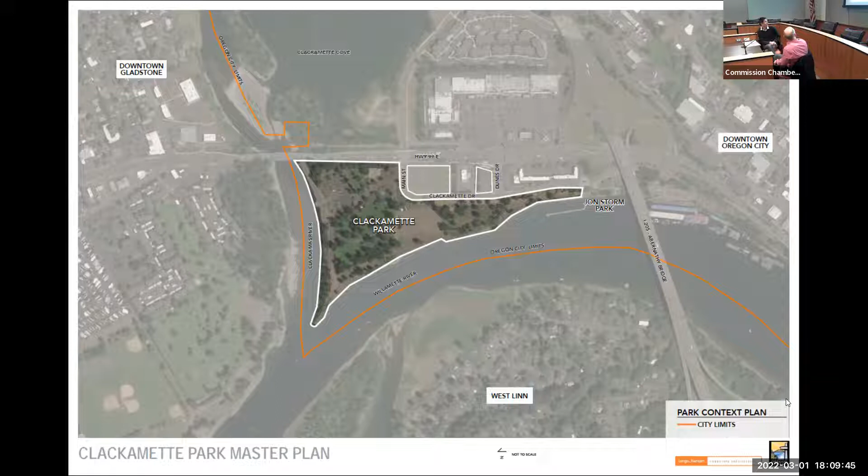Before we dive into some of the plans that speak to the specific characteristics and elements of the site itself, I want to briefly cover the history of the park, how it has served the community throughout the years, and what the character of the park is.

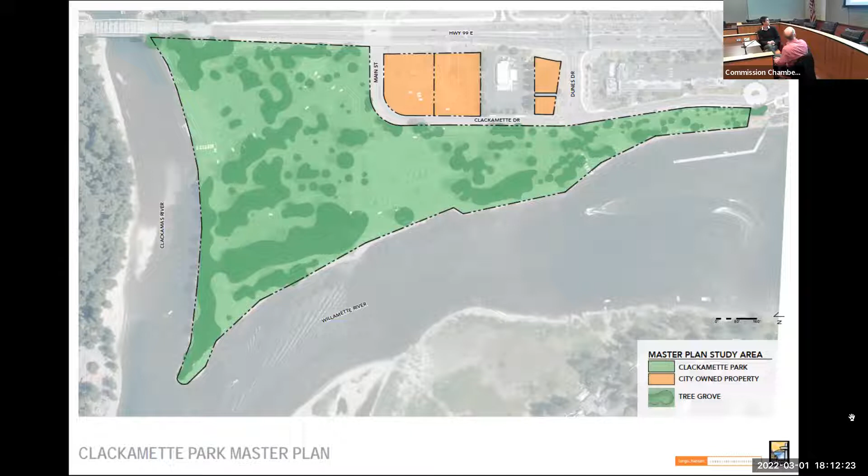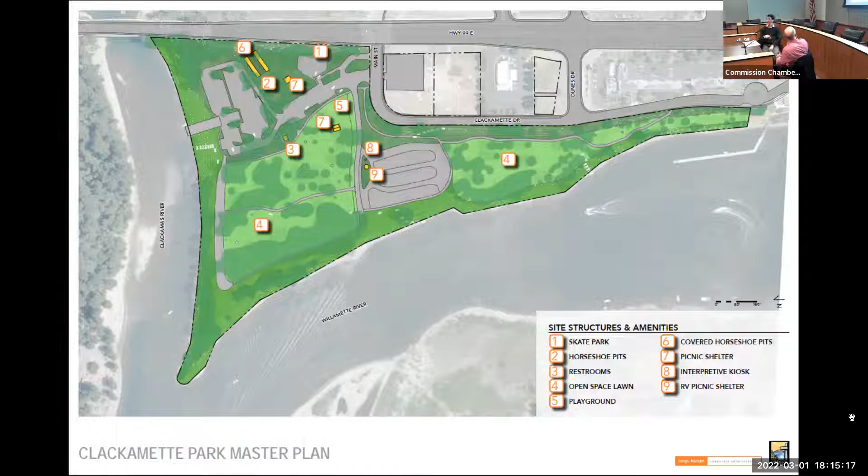Highlighting here is starting to look at the site structures and amenities, the buildings on site. As all of you are familiar with this site, I just wanted to review it. There's the skate park, rentable and reservable shelters, both covered and uncovered horseshoe pits, and a restroom. As in the photo earlier, there's one feature that's not built but is noted by number 4 - that's just the open lawn area. Numbers 8 and 9 are a small kiosk near the RV park, and a larger covered area built by some of the students.

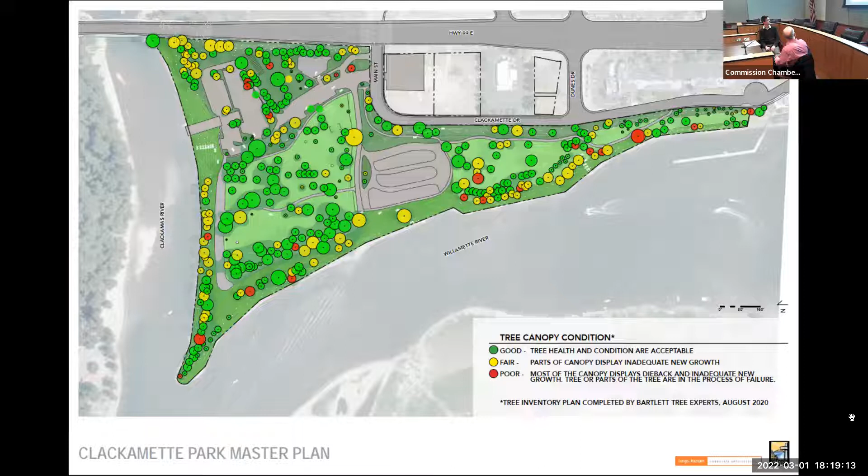We've actually spent a lot of time down in Clackamette Park, but for those of you that have lived in and visited it often, both here in the audience and virtually, we'd be interested if anything we presented - any comments, anything you think we missed or should add to these slides - just so we have a good basis for the design.

That's a good question.

Yes, yeah, August 2020. Anyone that was there, yeah.

At that point, I forgot to touch on just a quick overview of the tree species there. It was about 40%, 45% of the trees with bark are black cottonwood. Next in line is the Doug fir, maybe about 10%, then maple, and then a number of smaller species.

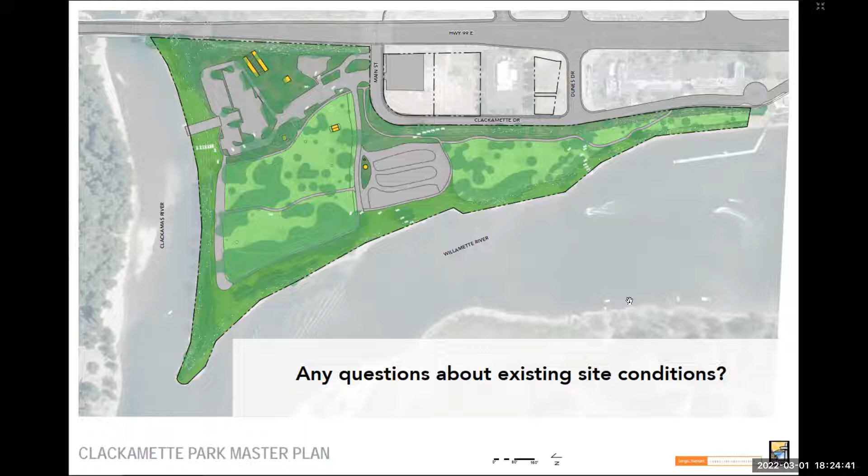I don't know if I missed that, but for people who have issues with walking, like what does the access to the park look like, and what features are available currently, or what is missing currently? We'll do that for the next round.

So one thing we have to remember now is that there's going to be possibly 1,000 people living at the cove there. There's probably 500 there now, but when it's all built out, there's going to be like 1,000 people. This is going to be their park too, so let's all keep that in mind. This isn't just the city, but I hope that you're contacting those folks, is it the Edgewater, I think it is called, because you'd see what they would like to see there too, because this is kind of their neighborhood park that we're all doing around here now. So, okay.

Jeremy, go ahead. Jeremy, are you there? Might be on mute. We can move forward, we can't hear you, Jeremy. No, we can't. Move on, and maybe you could also. Well, we can move on, and then we can hook. Sure, yeah, go ahead. Yes, we can hear you, Jeremy.

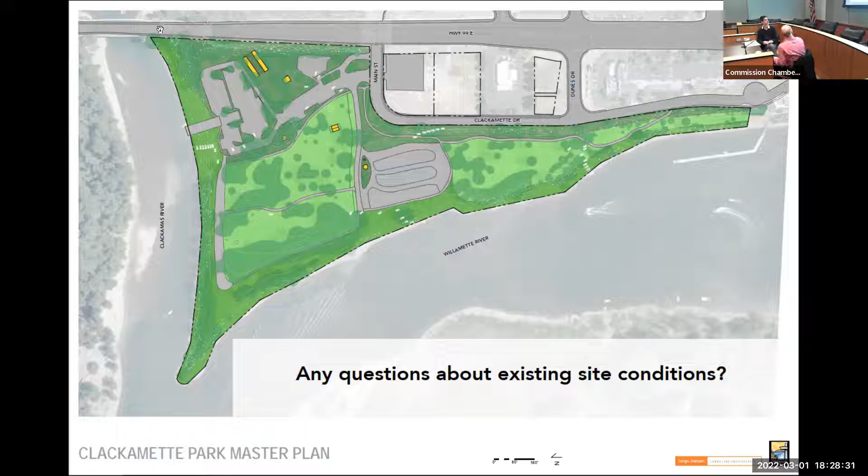Let's go to the next slide. So this is really more of kind of listening for us, and for those of you that took the public survey, some of these questions you may recognize, but we felt it was important to kind of get the word out and hear what neighbors and citizens had to say. We're going to start out, first of all, with just kind of overall park character.

We'd like to hear from you on your thoughts, and there will be some subsequent slides kind of associated with that. The second one, we'll really focus in on the site amenities. We really want to hear what your priorities are for what you would like to see in the park, both what's existing that you would like enhanced, or perhaps new amenities that you'd like to see. And then the third one, we felt it was really important, just the river access, to have a conversation on that particular part, kind of set aside from what's happening inside with the other amenities.

So let's go to park character first. The question, and it may seem a little open-ended, but how would you like the park to feel? If you go to the next slide, like to almost think about if you had a friend or someone that hadn't been to Clackamette Park before, you'd say, oh, we have to go down to Clackamette Park because it's just - and how would you want to describe Clackamette Park?

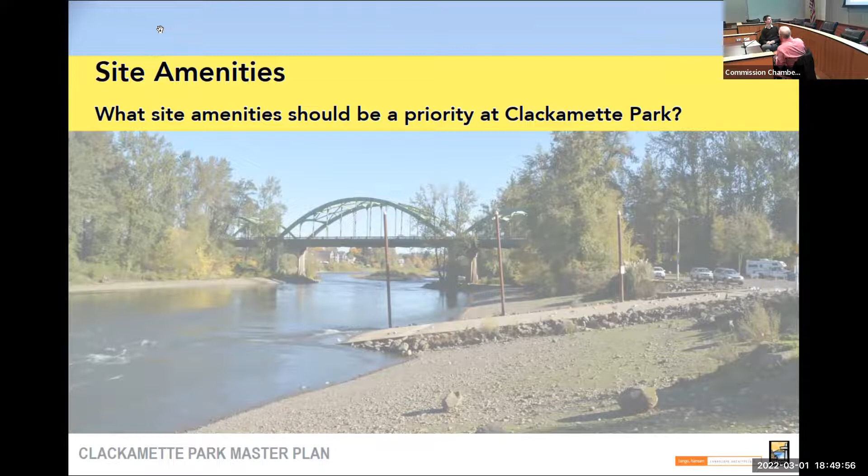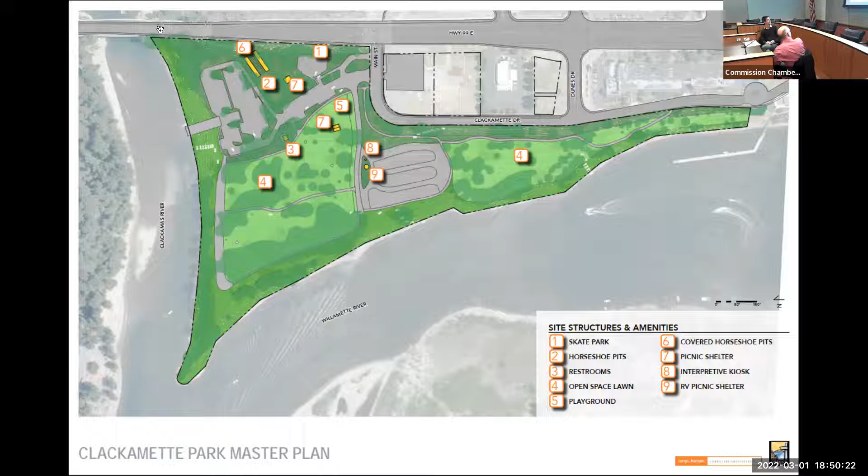Just as a refresher, you already saw this. I won't spend a lot of time, but the park has the skate park, the horseshoe pits, general open space, a playground with a single swing set, picnic shelters, interpretive kiosks, and the RV park as well.

I have a heartfelt place for things like interpretive signage, and I know there are issues with maintaining it and all those kinds of things. But we've talked about the unique nature of where the park sits, and the opportunity for interpretive signage at a lot of different levels is high there, if we can figure out how to do it without costing the city a fortune to maintain. I think that's the real challenge. We miss some opportunities there now, I think, that we haven't really reached out and tried to enhance to the level they probably should be. I'll hold off on some of the other things when we get to other discussions.

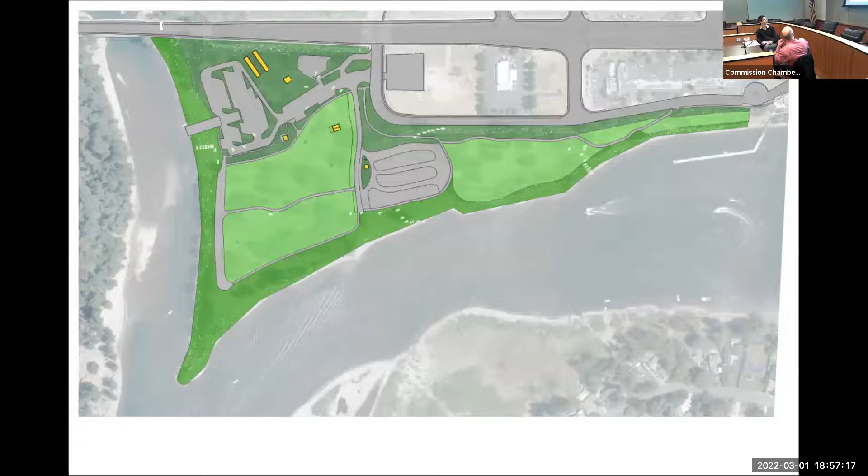Just a refresher—to the best of our ability we tried to show these different river access elements, maybe not exactly in this place for some of them, but we're showing the existing boat launch, number one.

Then there was a study done several years ago about relocating the boat launch about 350 feet downstream, so that is where number two is. There were engineering plans done for that, and that's something we'll consider as we begin to look at options and different concepts.

Number three, a human-powered craft launch. We've been talking a lot about the wave, certainly swimming, general shoreline access, and fishing as well. Some of these are more zones, so they're not just in that exact place. But the question—if we go to the next slide, Brian.

Just one more. We thought it was helpful to point out some of the other boat ramps in the area. We've been talking a lot about what's happening in our park, but on the Willamette there's the Sportcraft Landing, the Meldrum Bar Park, and further down the Cedaroak boat ramp too. So just thinking about river access, particularly the boat launches, and what's happening nearby.

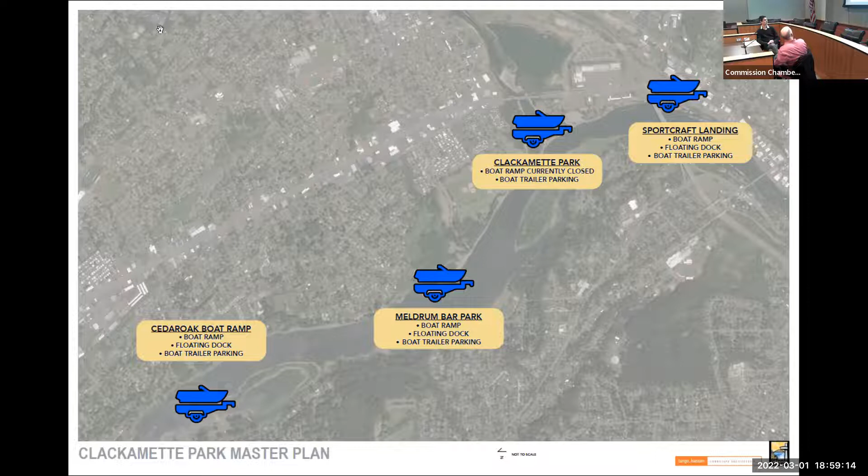So the last slide—this question is, what sort of river access best serves the community? Again, are there things not on this list, or things we should really be thinking about in terms of river access? What's important? What should we keep as we begin to look at these different master plan options?

Thank you. I'll just start out directly and say we've had a lot of discussion about the wave, and that's a really unique and interesting factor that has shown up there, and something we probably ought to try to utilize and work with. At the same time, we do need boat access—we do need a boat launch at this location. We've talked about Sportcraft, and I agree with this gentleman here.

I don't know how many in this room are good enough to launch a boat there at Sportcraft. You can probably launch the boat, but I don't know if you can get your truck back out of there after you've done it because it's so small. And there isn't really any way you're going to expand it—at least I'm not sure where, and I've been around that boat ramp for a long time. So that access is about 20 boats, as he said. That's about all you're going to have.

Meldrum Bar is another location. Obviously it's got a lot of room. And Cedaroak has some room too, though it's not a particularly large ramp.

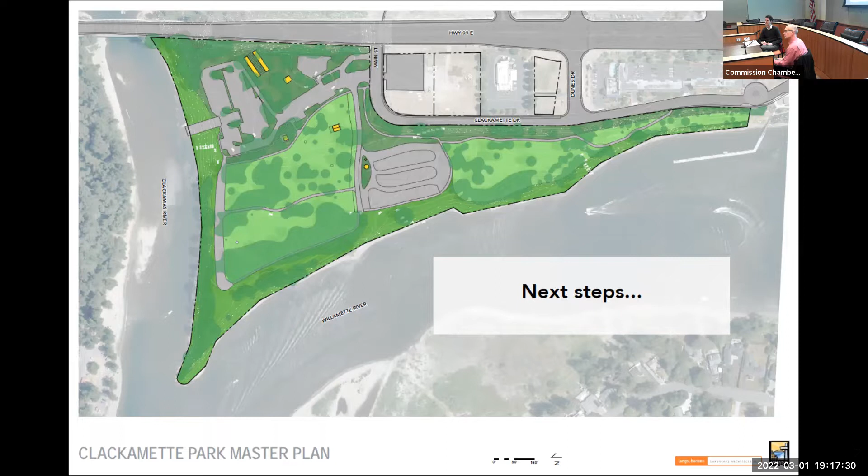I might embarrass myself here, but last time I was down at the park, there was only a swing set as far as play equipment, unless something has improved. It's limited, okay. Yeah, so there's only a swing set. If we could do something there and actually have a play structure, and increase the activities for the little kids, I think that would be great too - generally there's only one thing you can do with a swing set.

Anything else, just online? Nope, okay, nobody online.